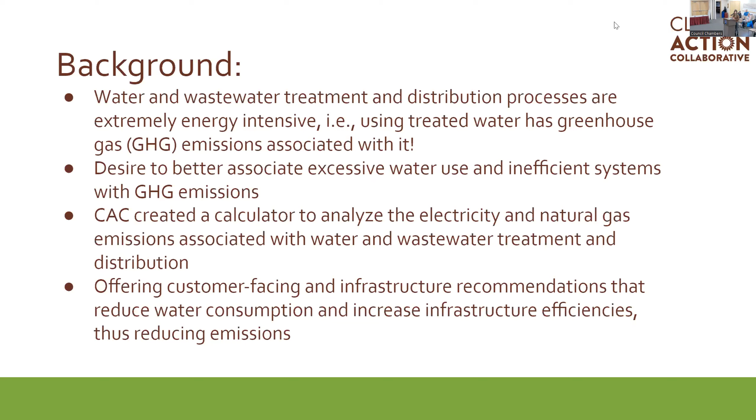So I'm going to go over some of the data we found from the Water Energy Nexus. Here are the results. They might be a little small, but hopefully they're available in the packet for all of you. As you can see, we looked at both electricity and natural gas from water treatment and distribution, as well as wastewater. But since Minturn does not treat its own wastewater, there was no information there.

The water treatment facility does run solely on electricity, there's no natural gas there, so all the emissions we can see here are from electricity alone. I want to give a shout out to Cindy, who I don't think is here, but she was very helpful in getting all the data we needed to create this calculator. So I just wanted to thank her while we were here.

The way the calculator works is pretty simple: we choose the utility provider, in Minturn's case Xcel Energy, then select the correct year we're looking at, so we looked at 2018 through 2020. We make sure we get the correct carbon intensity from the energy mix going into the electricity that year. Xcel is working towards renewable energy goals, I believe their goal is 80 or 90% renewable by 2030, so every year they're hopefully increasing that renewable energy percentage and being less carbon intensive.

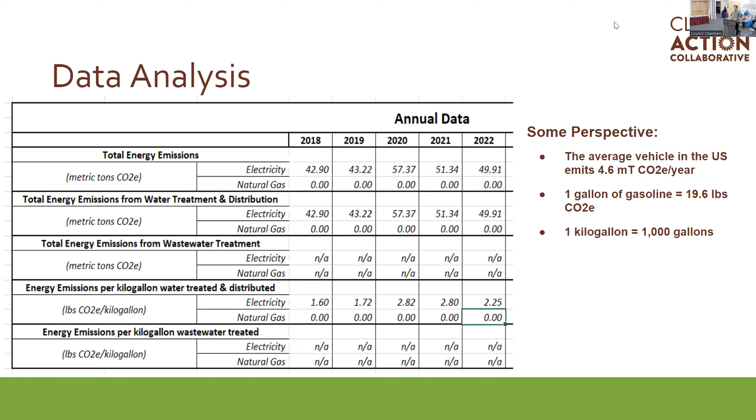From there, we plug in the amount of electricity used, as well as the amount of water treated and distributed, and we come out with these numbers after running the data. Looking at Minturn's emissions data, total energy emissions stay relatively constant year over year, equivalent to between about 9.3 and 12.5 cars on the road per year - kind of a visualization for how many emissions come from treating water for folks at Minturn. Emissions per kilogallon is a little less consistent, and we'll look at some graphs here to illustrate that. But for reference, 1 gallon of gasoline produces 19.6 pounds of CO2, so hopefully that puts things in perspective when it comes to these numbers.

So for data analysis, this is for total energy emissions. You can see the relative consistency year over year. I wanted to point out that the large leak on the service line North Main in 2022 didn't seem to disrupt emissions in any particular fashion, which I found to be kind of interesting.

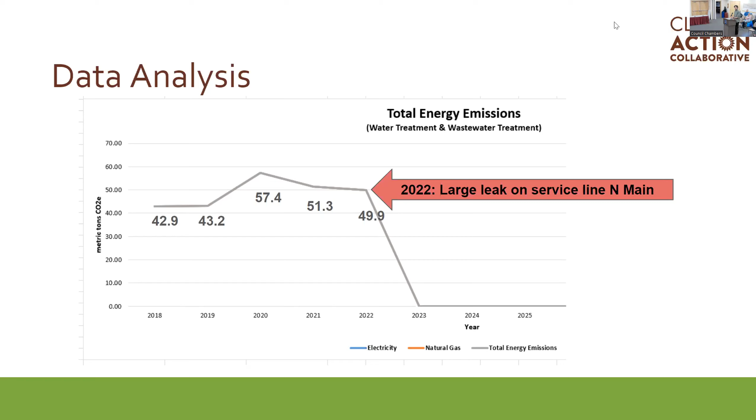Total energy emissions per kilogallon is a little bit different. This factors in the amount of gallons being treated and distributed every year. We can see that it varied, especially during COVID. The emissions tended to spike a little bit and seem to be returning maybe a little bit more towards normal here in 2022 and 2023. We'll certainly need to look at more data to see how this consistency or inconsistency looks over time, but that was just my initial reaction looking at this, a little less consistent than the total energy emissions.

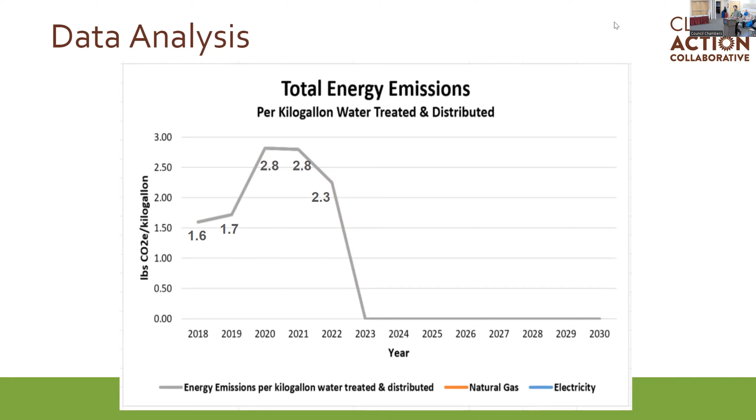I will say that Minturn's energy emissions per kilogallon are relatively consistent, as we've seen in other data we've looked at from across the country. There's an academic paper published about the state of California that analyzes various water treaters, and they found that greenhouse gas emissions per kilogallon was between 0.617 and 2.5 pounds of CO2e per kilogallon. Minturn is relatively in a similar range, so overall doing things well here, or at least in line with what folks in California are doing.

Next slide. As I was looking over the data, I did notice an interesting anomaly. If you look at the year 2020 in the months of February through May, highlighted in yellow, you'll notice that the total energy consumption is nearly double that of previous years and the years after. But at the same time, water treated significantly drops by almost 11 million gallons, or 11,000 kilogallons.

I assume that the amount of water being treated dropped due to COVID, that would be my best assumption. But I thought it was interesting that the electricity consumption jumped so high. If the town is interested, there might be some possible investigating to do, to figure out why this happened.

I know, we didn't take showers. We just were in our sweatpants. I see, we were really cranking on Netflix. Yeah, okay, in the water treatment facility specifically, that's where Earl hid out during COVID.

Well, anyway, that might be something to look into. It seems like back now in 2022, which is the last year we analyzed, things have returned back to a little bit more normal, but just something to point out and maybe keep tabs on year over year.

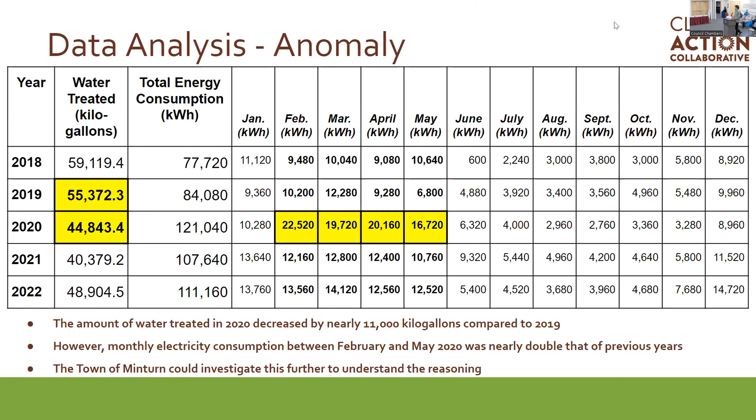In conclusion, next slide. In terms of emissions per gallon, they are similar to calculations from across the country. Minturn's relatively low energy intensive slow sand filter system for the water produces, or uses, relatively little energy to treat. That's something that's good. But if Minturn was to construct a process packaged water treatment plant or membrane filtration system plant, as has been at least talked about, most likely energy consumption and therefore emissions will increase to some degree.

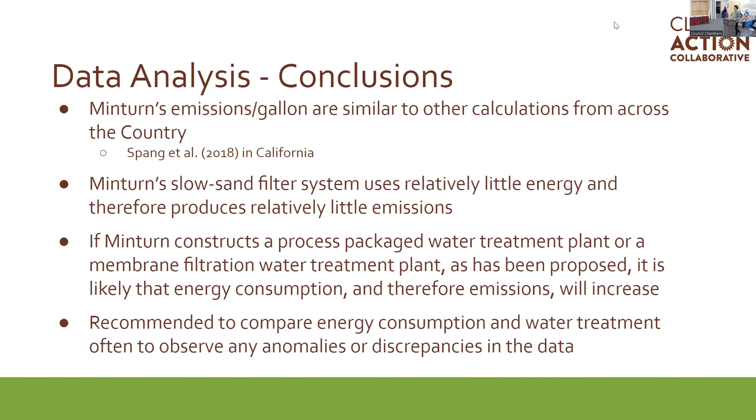We recommend that you continue to compare energy consumption and water treatment often to observe any anomalies or discrepancies and hopefully eliminate that so the town isn't spending more money than they need to. So, right back.

Okay, now on to some recommendations, starting with customer facing. Go to the next slide.

The first of which is updating rate structures to a tiered system. Utilities that commonly use this practice will utilize a single family equivalent fixed fee, meaning this is the fee that everybody pays per household. Then there's a tiered rate per kilogallons of water utilized within that single family household. This is a similar structure to what Eagle River Water and Sanitation District updated to, and it makes the process more equitable across the board, not allocating more water to larger homes. Everybody pays this fixed fee, and if you continue to use above the tier that is cheapest for kilogallons, then you pay more money.

How it applies to the town, it's my understanding that you utilize a tiered structure for outdoor irrigation accounts, which is awesome. I think that's the best way to do it, to disincentivize excessive water use, especially for outdoor irrigation. But this can also be applied to residential and indoor accounts, by applying that single family equivalent and utilizing a tiered rate structure.

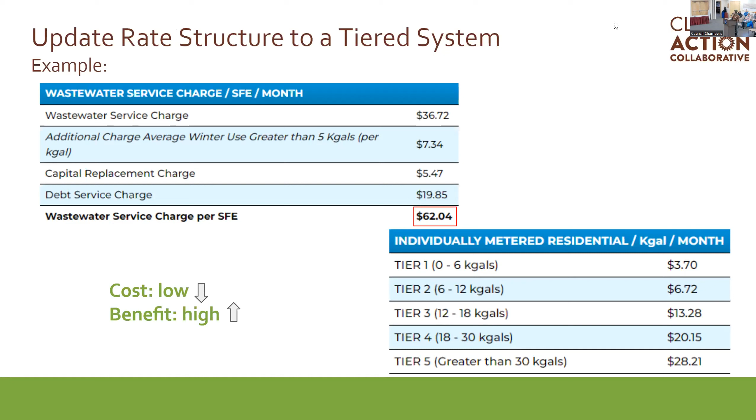Next slide, please. Just wanted to provide an example of what this looks like at the water district. You'll see on that first image, the bottom is the fixed fee folks are paying for wastewater. Then from there, if you're using 0 to 6 kilogallons, the additional fee associated is shown on the right-hand side of the below image, and it goes up from there. So really just disincentivizing that excessive water use. The cost for the town to do something like this is relatively low, but the impact is quite high because you're really attaching money and dollars to that excessive water use.

Next slide. Implementing smart metering. Smart metering technology analyzes what's going on at the water meter level. It can detect things like leaks and excessive water use. It's a great way to collect data accurately and in real time. It's my understanding that Minturn is almost complete updating meters within the town to smart metering technology. The best way to utilize this technology is to ensure that you have somebody analyzing it on a relatively consistent basis, so you can check for leaks and excessive use and know who your high users are, and possibly direct resources or advice their way.

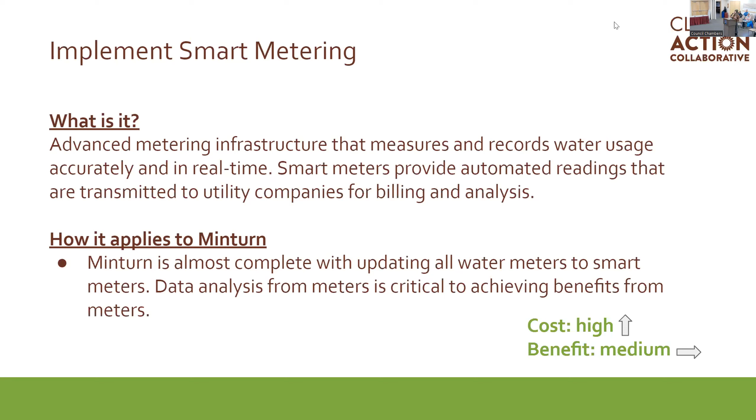The cost to do this, as with most infrastructure upgrades, is quite high. And the benefit is medium, simply because it's primarily a data collection mechanism, and you really have to have an action associated with what that data is telling you to get the impact out of it.

Next slide. Offering rebates and incentives for water efficiency is another great route to go. If you've noticed, there's a pretty big focus on outdoor water consumption. That's very intentional. Most of the water that comes out of our sinks could be captured by wastewater treaters, distributors and utilities, so it's not really lost. But that outdoor water is oftentimes lost to the landscape and doesn't come back into that system to be reused. So that's really where we need to focus those water conservation efforts.

As this relates to rebates and incentives, the Beyond Lawn program is run by the Eagle River Watershed Council and the Conservation District. They are offering rebates similar to what the Water and Sanitation District offers, except for those outside of the Water and Sanitation District boundary. So those do apply to Town of Minturn residents. It would be awesome to promote this to town residents.

One thing the Beyond Lawn program administrators are asking many communities for is matching rebate funds. This would allow the town to contribute match funds, increasing the dollar amount residents can access for things like irrigation assessments and upgrades and perhaps turf removal rebates. The cost of this would be medium for the town, and the impact would be medium as well. Next slide.

Promoting irrigation assessments. Irrigation assessments are a really awesome tool where an irrigation professional can come out to a large or small property, whatever it looks like, and take a look at the irrigated landscape as well as the irrigation system accompanying it. At the end of their analysis, they give the homeowner or business owner a detailed report with recommendations on things to do to both save water and save money.

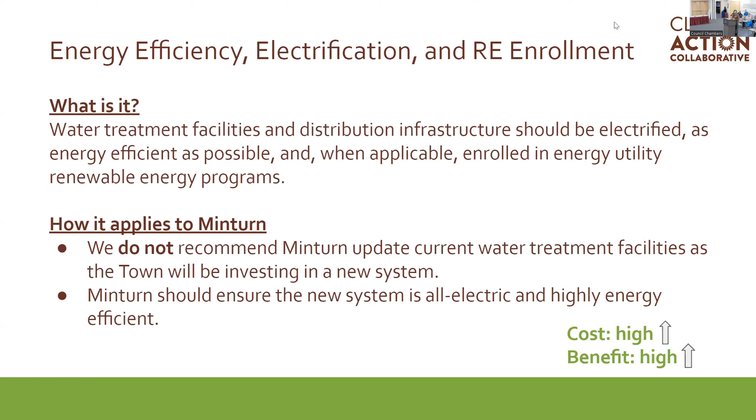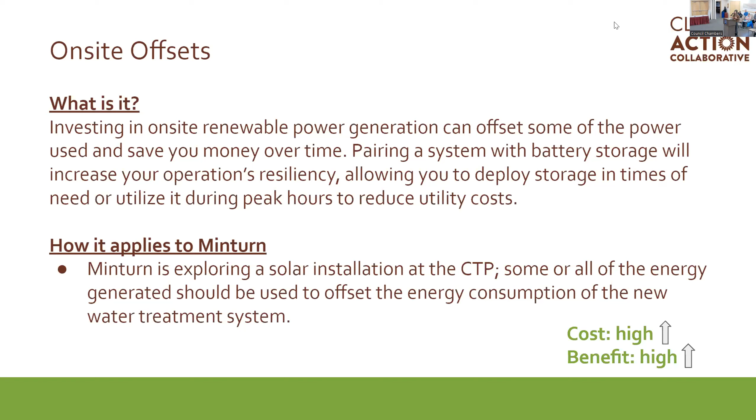On-site offsets. This is utilizing renewable energy on-site offsets to reduce the emissions associated with that infrastructure. Town of Eagle is a great example — they just invested some money into an on-site PV system that's going to reduce or essentially offset the emissions of their new water treatment plants. It's my understanding that Minturn is exploring a solar array at the consolidated tailings pile, so some or all of the energy produced from that solar array could be used to offset the future, more energy-intensive water treatment infrastructure. Cost is high, benefit is also extremely high here.

Next slide. Final thoughts — there are more recommendations that we've offered the town. These can all be found in that full report in the packet, which includes some more detailed analysis on the data, as well as the full suite of recommendations for customer and operational efficiencies.

Another final thought is that outdoor water conservation is really critical for our drought and arid region, and it has a greenhouse gas reduction impact. Water treatment and distribution are highly energy intensive, so doing what we can to make those processes more efficient and have less of a greenhouse gas impact will save the town both money and mitigate costs and energy burdens.

Thanks, happy to answer any questions. Go ahead.

Okay, I just have a couple. First of all, thank you very much for this, and I think a lot of these suggestions are really good, and a lot of them I think we're implementing or in the process of implementing. But I did have a couple of questions, and one of them I did not understand at all.

I understand why it might be a good thing to have a tiered water system based on water usage, but then you go on to tie that to square footage. And I don't understand that piece at all, because you might have a larger home with many more users. And if you had a tiered system, they're paying more for their extra use anyway. Why would there be a specific additional charge you would want to do? Plus the fact that we, in town, in terms of fixed costs, do charge differently for homes 3,000 square feet and under, and homes 3,000 square feet and above pay double, or up to double, for water taps.

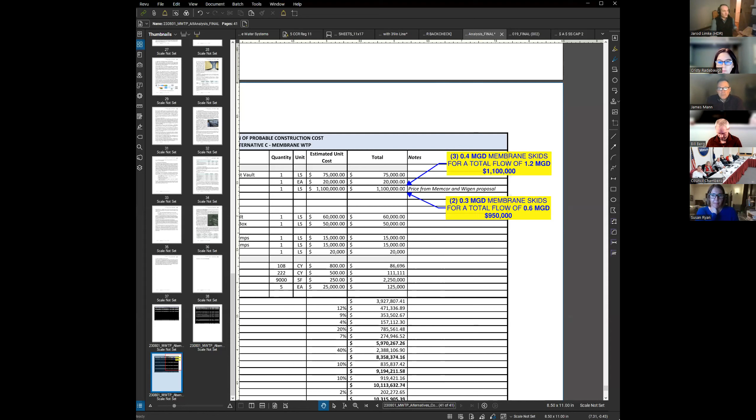This is the very back page of our alternatives analysis. Can you see this? We can enlarge it. Okay, perfect, so I'll zoom in here.

Basically, what I'm pointing to with these two boxes is our line item price that we got when we reached out to a couple of manufacturers for membrane skids. What I wanted to convey is the cost saving potential while we increase and decrease capacity. There's going to be a caveat on this after I explain these.

So the top one there, the quantity is 3, 0.4 MGD skids, for a complete total capacity of 1.2 million gallons per day. The price we got from one of those manufacturers—I don't want to name which one, because they each sent us a proposal that asked it be kept private and confidential.

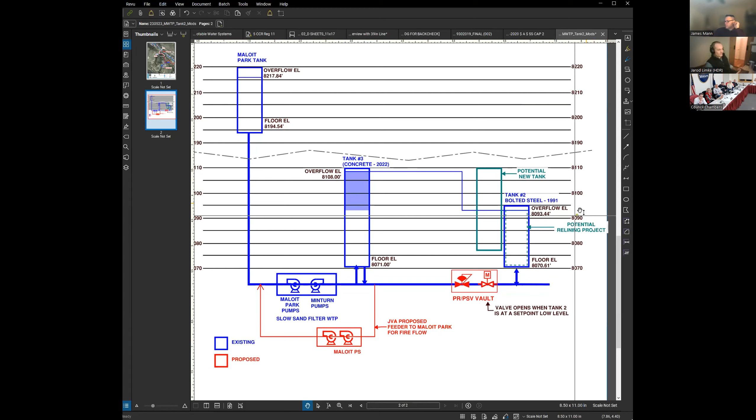What I've done is I have diagrammatically placed those tanks on a graduated graph here, showing their relation to one another in elevation. And that's important because water is always going to seek its lowest elevation it can get to. Tanks and pipes keep it at elevations we want it to, but without those physical restrictions, that water is going to flow to its lowest possible point. It's going to seek its point of lowest potential energy.

So I'm going to zoom in a touch on just tanks 3 and 2, because Maloit Park tank has very little, if nothing, to do with this. It's on its own pressure system already.

So right now, tank 3 was built with an additional approximate 15 feet of available volume higher than the overflow elevation at the existing tank number 2. And so what that means is if nothing is done and you attempt to fill tank 3 to the very top, it's going to overflow tank 2. What would actually probably really happen is you could just never fill tank 3 above the overflow elevation of tank 2, because they're hydraulically connected in your system right now. So you would never really see this condition. And that's a bit of a bummer for you because you have all this good tank volume up here that you want to take advantage of.

And going back further, all of the water plant designs we considered were relying on this tank for disinfection. We need all the volume we can get in that tank to obtain adequate disinfection so that you can report to the state that you are disinfecting properly. So obtaining the shaded volume section up here is very important: one, to make sure you're getting everything that you bought, and two, to make sure that you can provide disinfected water should a water plant go in.

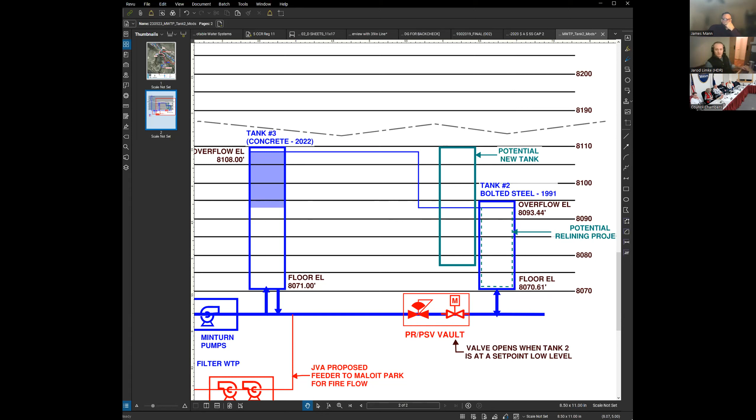So I can... we do not have an exact location. This is kind of the reason for looking into doing more investigations on this. If I were to share my browser, I have Google Maps up, kind of in the vicinity. Actually, I don't even need to do that. I got my own figure, but that's okay.

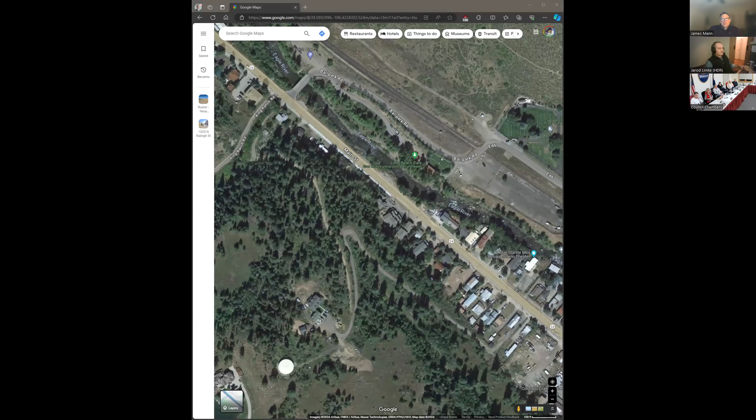Sorry, I'll stop moving that around, but hopefully that answers your question. The pressure is not going to change it. It'll always be what it always has been. The people that will see a change to pressure are the ones south of where this valve ultimately gets installed, and they probably won't even notice the increase. The only person that might notice is John Volk, because it's distribution side pressure.

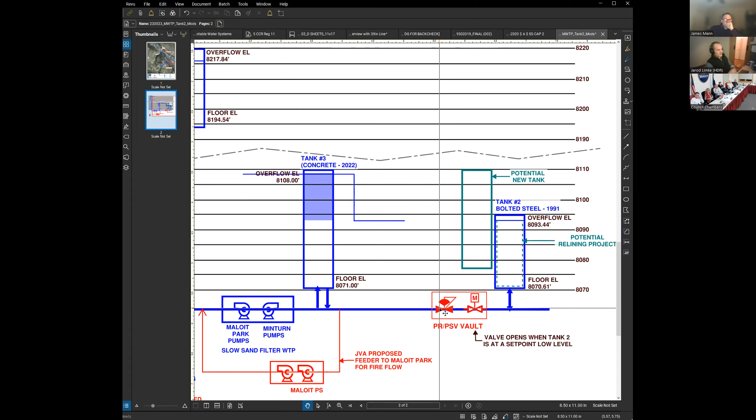The reason we were always putting it there is because that's the figure we've been looking at for some time relative to its use of tank 2. So looking back, if this pressure differential were done on your property at the water plant with a new vault there, that gets rid of the complications of putting the vault in public right of way. It puts it back in a location more easily accessed by town personnel. That would allow us to fill tank 3 as high as we wanted, and the pressure in the system would remain as it always has been at that overflow elevation for tank 2. So preliminary answer is yes, we could locate this vault back by the water plant on the main as it goes out to town, without any changes to anything in town.

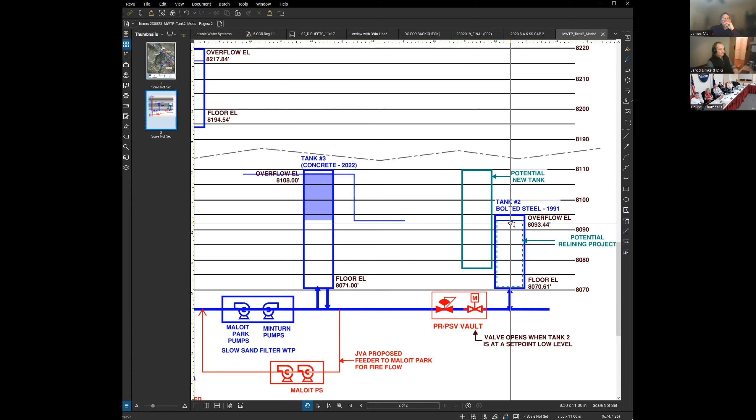So that would be a good solution. The infrastructure inside that vault would still remain the same — we would need all of the same infrastructure, I'm pretty sure, before I dive into that some more. I'd have to think about that. But heading off the question of how much it would cost if it's not in public right of way — mechanically, assume the same infrastructure for now.

There's another reason it might be at that location. I just want to make sure we're not overlooking something, but that's also a proposed loop area that we don't currently have, that we need for our system, coming up Boulders to the end of Boulder Street. There's no loop on Boulder right now, but that's where a redundant loop should be, and that could tie in with that vault.

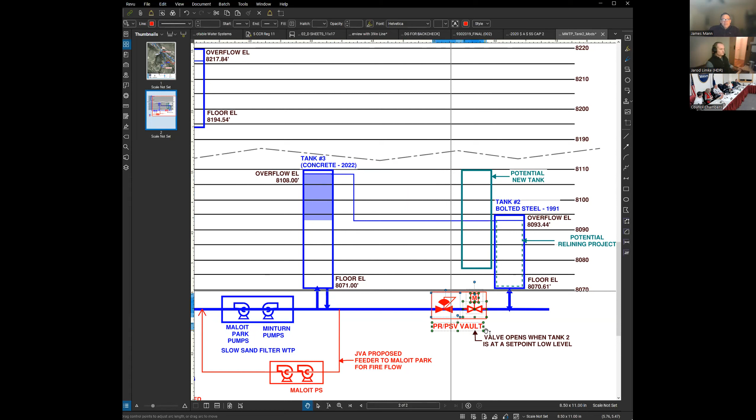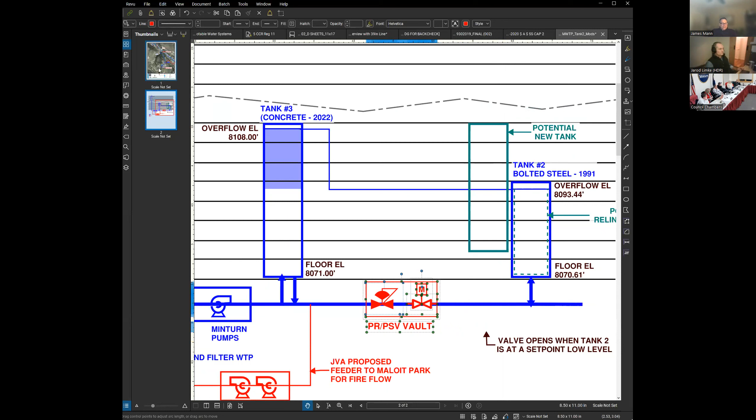Is there a reason? That would have nothing to do with this vault. The one thing I would add, Jared, is we're working on the pedestrian improvements on Highway 24 right now, so we're looking at as-builts and where that water line actually lies in the highway. We need to get together and look at it, because not far from where you originally showed that, the water line tends to drift towards the west, towards the bottom of that drawing, and it gets out of the travel lanes of Highway 24, which will greatly reduce the traffic impacts and traffic control required. There's room in the right of way to put it without getting into the highway itself.

One of the bigger complications was digging a giant hole in or adjacent to the highway. When Minturn North comes online and adds — I keep forgetting the number — a bunch of new taps, would it make sense to divide the distribution system for future growth north of town, so you're not spreading the 60 PSI over a greater area? Does it make sense from a pressure standpoint to have them equally spaced? Actually, no — the Maloit Park part is going to service the school district, that doesn't affect that, because Maloit Park is on their own system, they get pumped water from the plant. So it's just tanks 2 and 3 that need to work together.

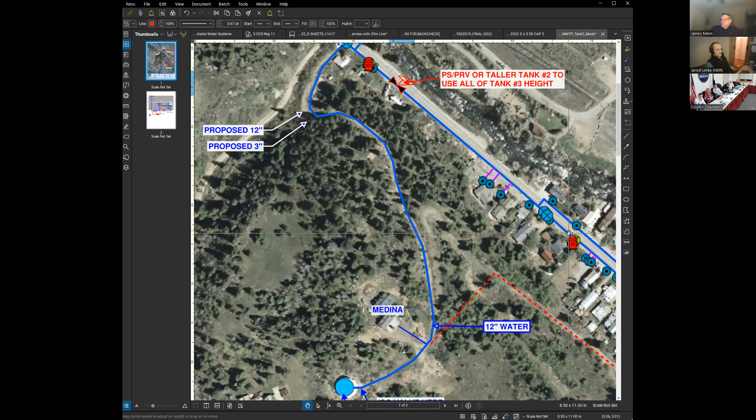So if instead of installing this pressure reducing valve here, we install it back closer to the water plant, just downstream of the outlet to tank 3, there would be essentially no change to the distribution system in Minturn as it is today, because right now tank number 2 is setting the hydraulic grade line in the distribution system, and tank number 3 is approximately half full.

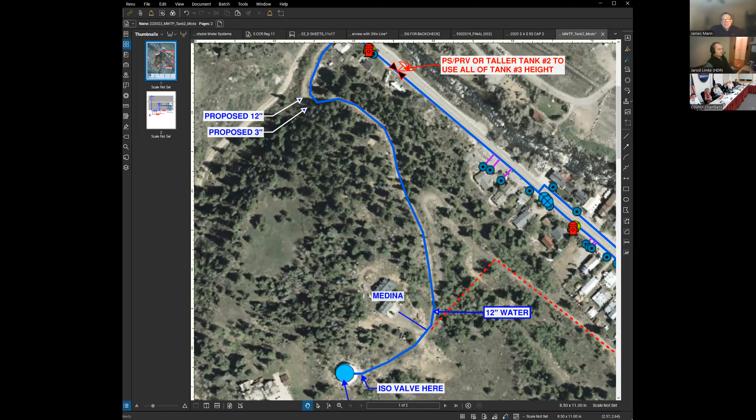Jared, I think it's important the council understands this only affects the water pressure. The entire town still gets the advantage of the volume of both tanks. So by doing this and rehabbing tank 2, we actually get the benefit of a tank and a half. Actually, you'll have almost 2 full tanks because they're both right at 600,000 gallons. This increases your storage volume back to where you originally wanted to be, and reduces your losses. This seems like a really good thing.

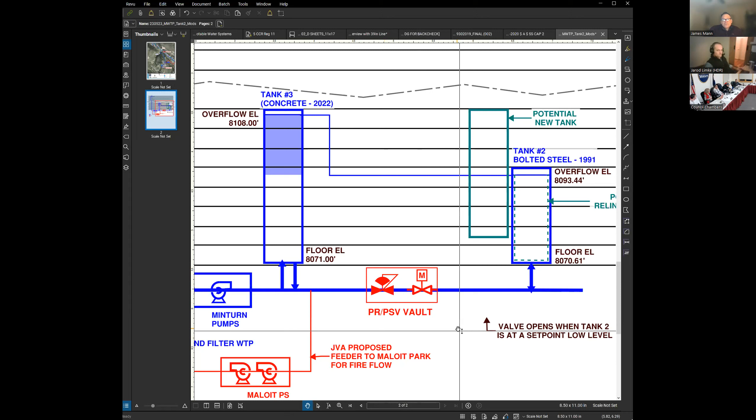It reduces your losses too, because if it's a leaky tank, that's water being lost. Very leaky, that goes without saying. It's an outdoor shower right now. That's another one of those low hanging fruit issues boosting your losses. Yeah, that's how we built the new tank, and redundancy.

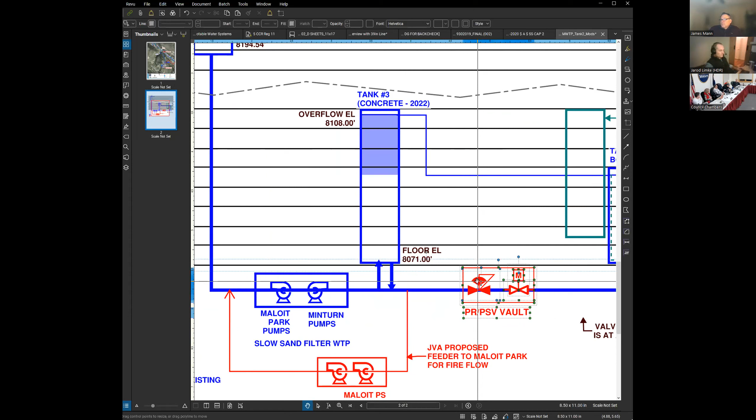Any other thoughts or questions for anybody? I think we're all on board. I think we got direction for staff. Cool, a short discussion.

So have we given direction? Clarification, is that number 7,500 or 750,000? 750,000, okay, so the decimal point on the top one, okay. Verify. So that, obviously the new tank, fine, this didn't work out for a new taller tank, and this is a better option.

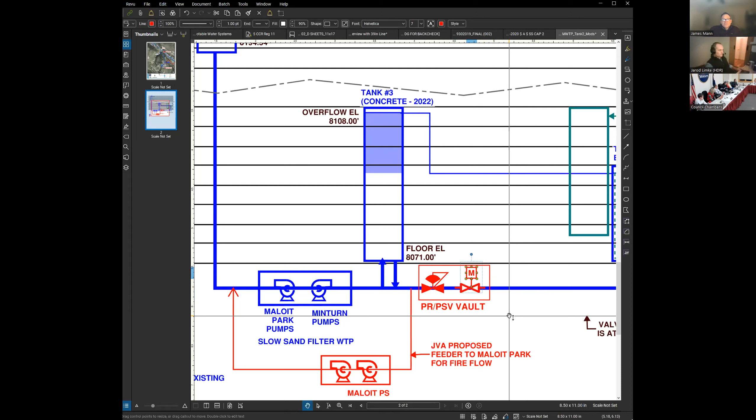Jared had actually reached out to a couple of tank manufacturers to try to get estimates. I didn't want to burst your bubble, but I thought it was pretty obvious new tanks were going to be multi-millions. We knew that, but we wanted to have numbers for you nonetheless. So new tanks would be multi-millions. This option would come in at a price that would not increase water rates.

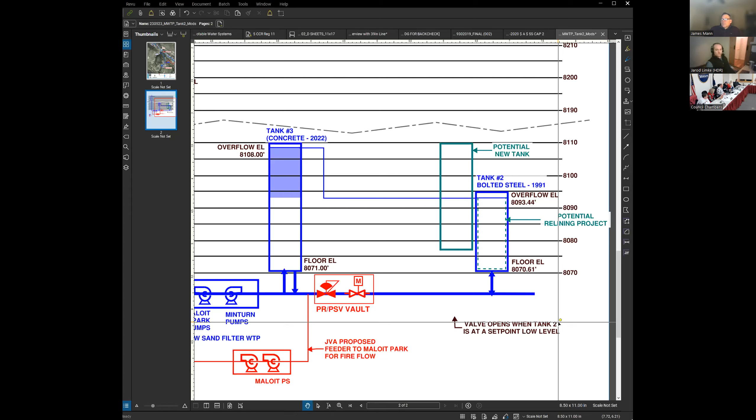Okay, any further questions? Everybody ready? Good, okay, well, and Jim is here. Do we need to have anything to ask of him? That's a question for you. Anybody, if you had any questions for Jim pertaining to costs associated with this option, given that it's coming out of the water tank loan we're already paying on, I wanted Jim to be available in case you had questions.

More for future reference, I'd like to kind of know what O&M would look like for the vault, just to understand what our ongoing costs are, but I don't need that answer tonight. That's more for the future.